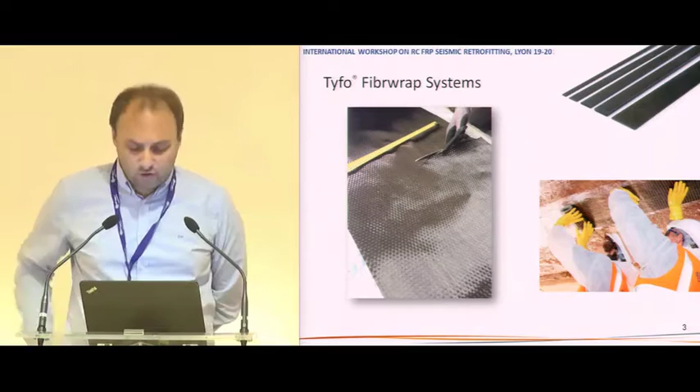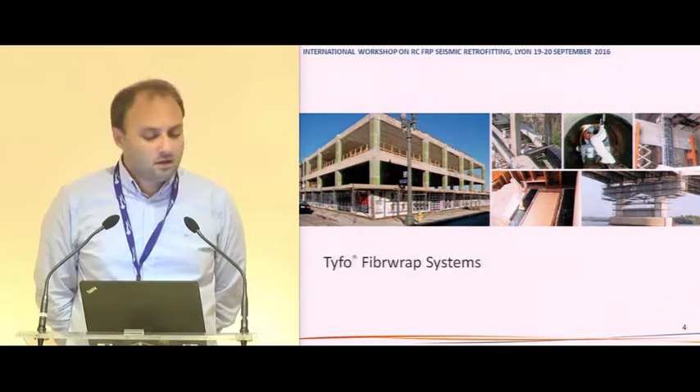After that, there were thousands of projects all around the globe, both in buildings, bridges, and other types of infrastructure projects like pipes. Blast mitigation is also a big part of our projects, and industrial structures overall.

We can easily say that it is nowadays the most approved system in the world. We have approvals in the United States, obviously, especially the ICC, the International Code Council approval. We have approvals in Germany by DIBt. We have approval here in France, Avis Technique. Obviously, our epoxies are CE certified for use in the European Union, and the same exact system with the same properties and the same epoxy is also approved in Australia, New Zealand, and all over Asia.

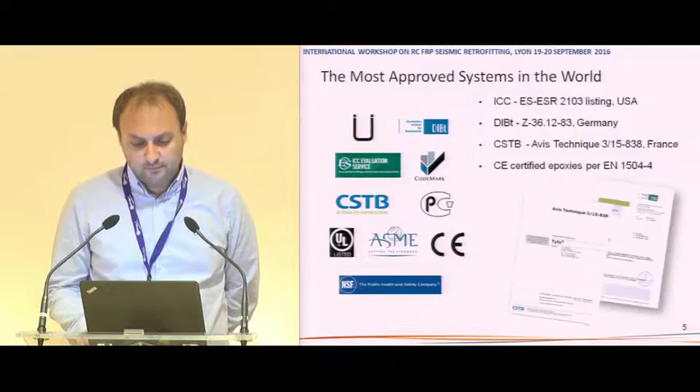As I said, we started with research, and I will show afterwards. We consider ourselves pioneers in the field of FRP strengthening, of structural strengthening by means of FRP. Afterwards, a lot of research followed. We have a really strong connection with academia. We were on the wave of FRP development, so the company was evolving in parallel with the technology. Most of the first tests in the field of FRP structural strengthening were done with our systems.

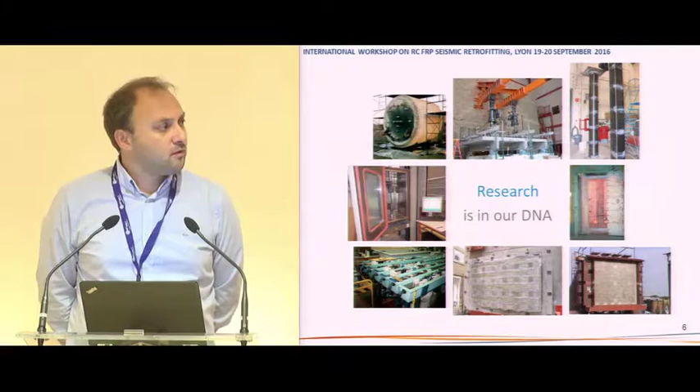We have now thousands of test reports. Some of them are obviously outdated now since there are newer and more evolved reports after them.

We also participate in committees, such as the CSTB committee and the AFGC committee, for the new guideline that you saw in the box - it was given to everybody. It's the new guideline in France for seismic strengthening with fiber reinforced polymers.

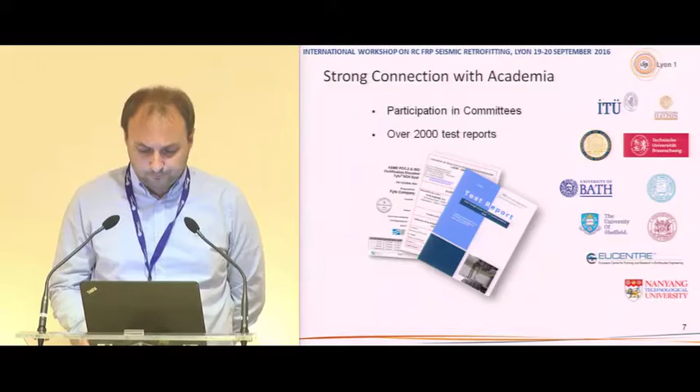This is the first test that was done for Caltrans. It was done at the University of California, San Diego back in 1988. The demand back then was to have a very rapid way to strengthen bridge piers after the event of an earthquake. I was not present at this type of test since I'm a lot younger.

But what I have heard is that Caltrans was actually investigating having prefabricated steel jackets ready for the event, to go and install them just after the earthquake so they could prevent collapse from a second earthquake. Then the idea came up to wrap these columns with materials that up to then were mainly used in the aerospace industry, and introduce them in this type of structure.

So this was the first test - a large-scale specimen of a bridge pier. It was loaded laterally until it failed. You can see here exactly the shear force versus displacement diagram.

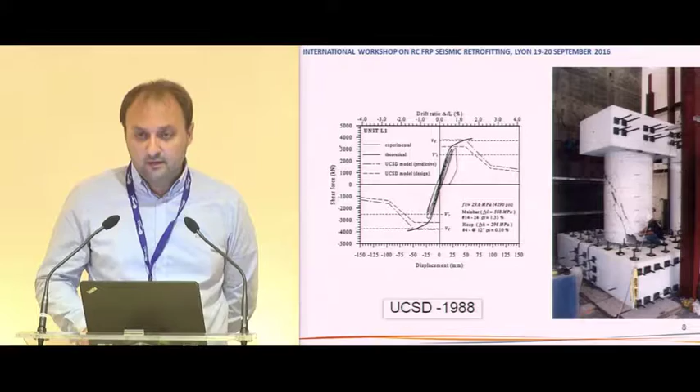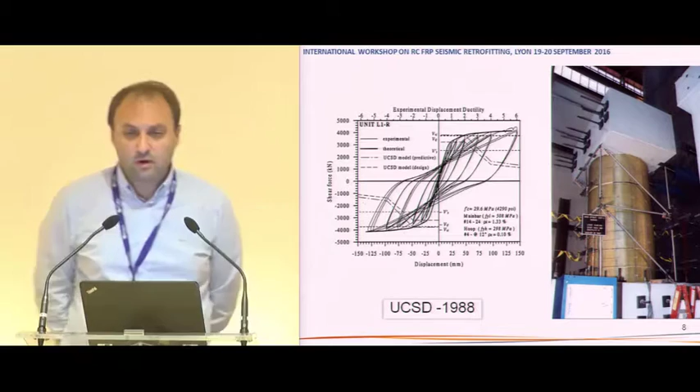Then the same column was repaired and wrapped with an aramid-glass type of fiber reinforced polymer back then. You can see the hysteresis loops and the deformability that this column had. This is one of the first tests that showed what we call the ductility enhancement - the capacity of the column to deform more without failing when it is wrapped with a fiber reinforced polymer jacket. More or less, this is how everything started.

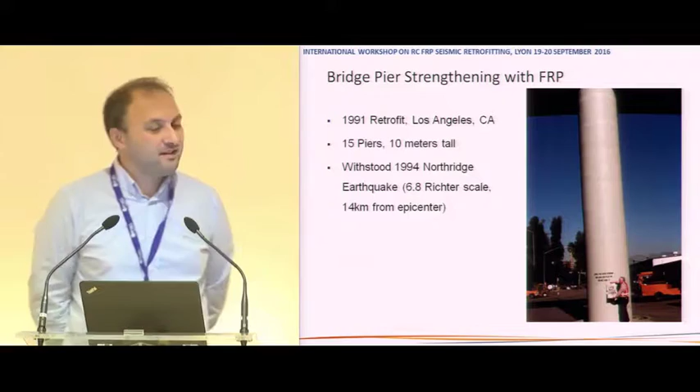The well-known Northridge earthquake followed - the epicenter was close to 14 kilometers from these piers. Here you can see the founder of the company back then, Edward Fyfe, going there with a newspaper from the earthquake, showing that the pier is standing and everything is okay.

We continued with seismic upgrade for improving the ductility of reinforced concrete columns. Thousands of columns are wrapped in this way, either with carbon fiber reinforced polymers or with glass fiber reinforced polymers. Glass fiber reinforced polymer is a good solution for seismic strengthening, since glass fibers can deform by far more than carbon fibers, though they don't have the same strength capacity.

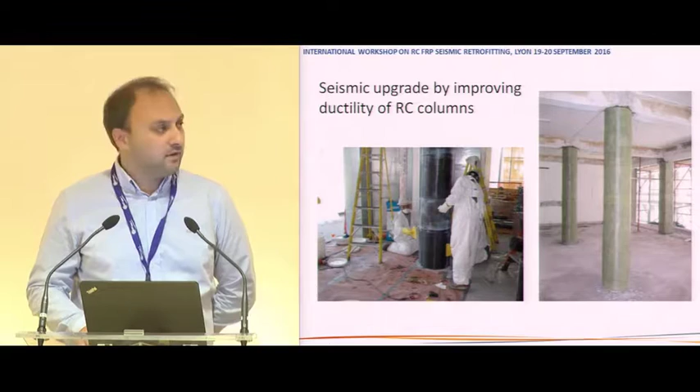But in the case that we just need to wrap for ductility, we need this elongation, and there is also the main advantage that they are by far more cost effective than carbon fiber reinforced polymers. Here you can see also some wrapping application of bridge piers.

Apart from the ductility enhancement, other types of strengthening of members were investigated, adding to the capacity. So here we see more like RC columns with high aspect ratio, or wall-like shear walls, that take a lot of shear acting on them during the event of an earthquake.

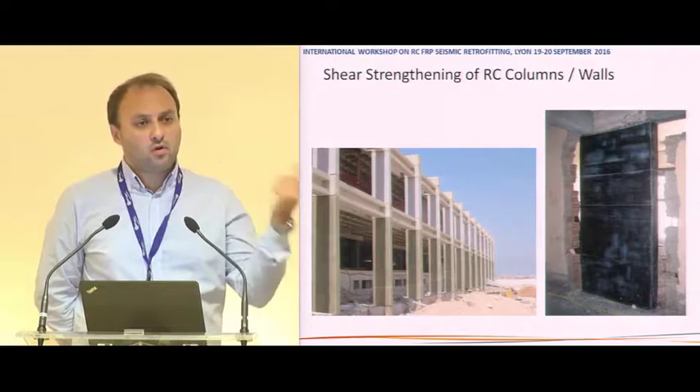So here the application is in order to increase the shear strength of the structure by adding more hoop reinforcement around the element.

This is also a type of application like that, for strengthening of a bridge pier at its base, where most of the shear action can be found during the event of an earthquake. Also, this is a bridge pier where an earthquake passed afterwards, I cannot recall which one, and still we have a satisfactory result.

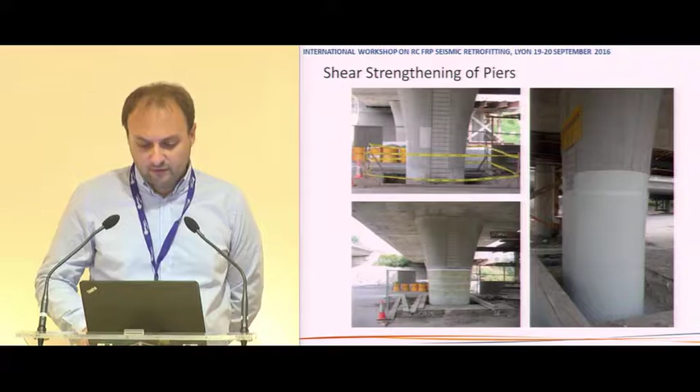Now I want to talk a bit about the Tyfo composite anchors. Fyfe is more or less the inventor of this type of system. It is an obvious way to move the stresses from the wrap inside the concrete or through obstacles. We use it to go through walls.

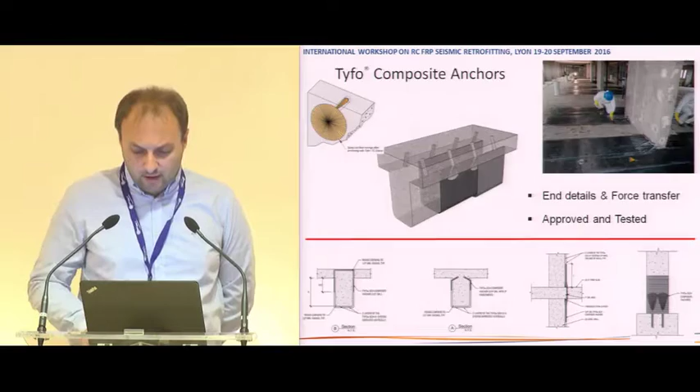We use it to strengthen a U-wrap of beams, as you can see here. We even use it for this. First of all, this is tested, tested also here in Lyon, in order to be involved in the Avis Technique approval.

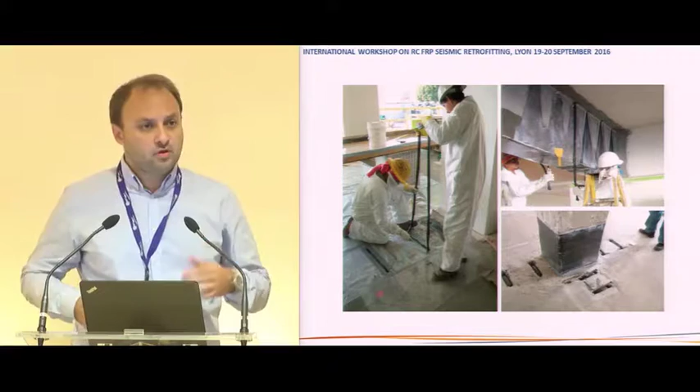We can use it even to wrap around beams. This is a case where we actually increase the ductility, the deformability of the beam, but since all the beams have the slab, we need to go through. So this is a way that with a full wrap with Tyfo anchors, you see they pass from the top, come down, open, and then also a U-wrap follows. Like that we can fully wrap the beam.

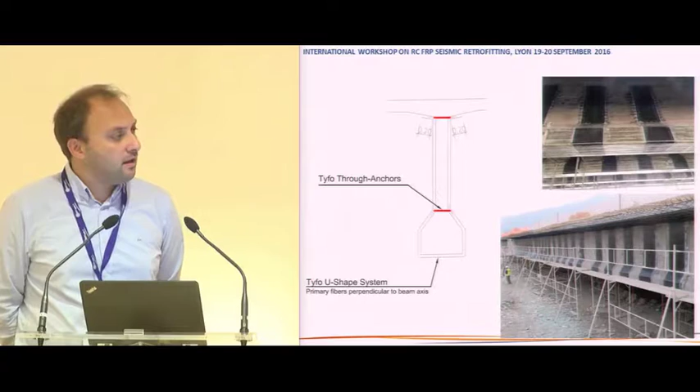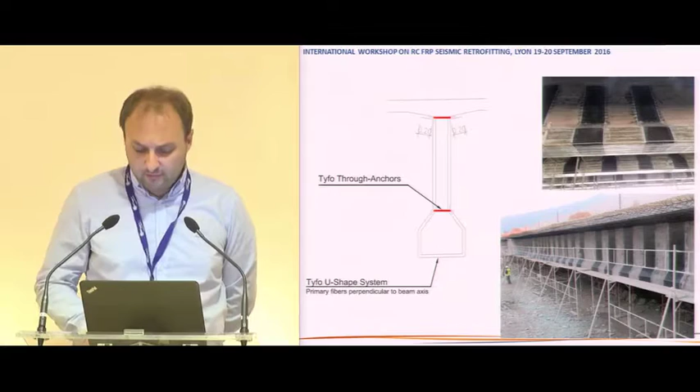Another application of anchors here is for shear strengthening of bridge piers. Bridge piers with a nice shape that includes angles may debond the system when the beam is under load and the FRP jacket is activated. So the anchors here are used in order to connect the two sides and to prevent debonding. We're talking about through anchors in this case.

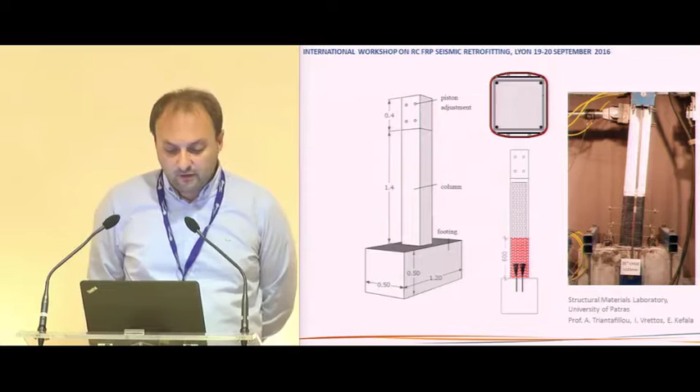Another interesting case is strengthening of columns into the foundation. This is testing completed at the University of Patras with Professor Triantafillou. It was a seismic test with lateral deformations. We investigated various types of anchors and configurations, including fiber optics to see exactly the strain deformation inside the anchor.

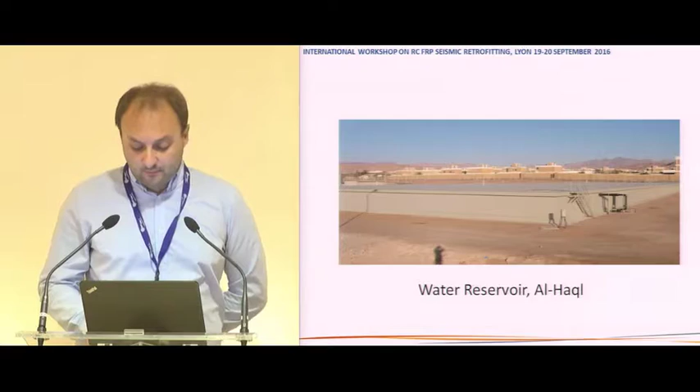A project based on that just followed. This is a water reservoir in Saudi Arabia. It had around 616 columns inside. Saudi Arabia, in the area of Jeddah, has a slight seismicity, and especially for such important structures as a water reservoir, they need to prepare for the possibility of an earthquake occurring in 1,000 years, so these important structures needed to be strengthened.

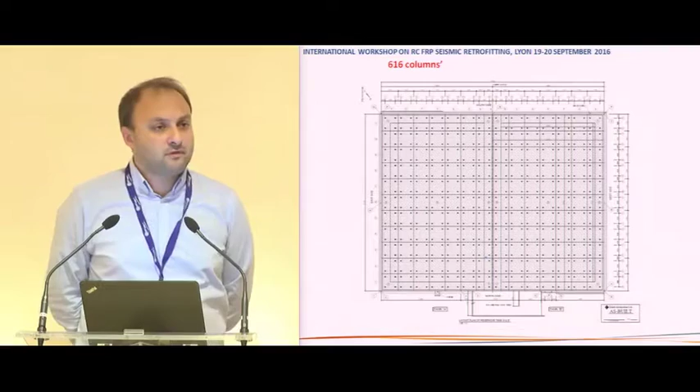So all these columns needed to be strengthened. The initial detail was actually to apply a new concrete jacket, which would significantly decrease the capacity of the reservoir.

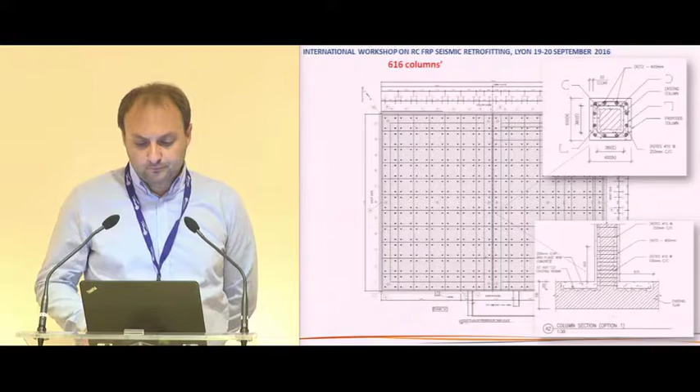We came with an alternative, and we gave the solution of wrapping the elements for having both the flexural strengthening required by using the Tyfo anchors inside the foundation, and also at the top at the slab, as well as wrapping around in order to increase shear and, in parallel, increase the ductility at these areas where the plastic hinges are about to be formed.

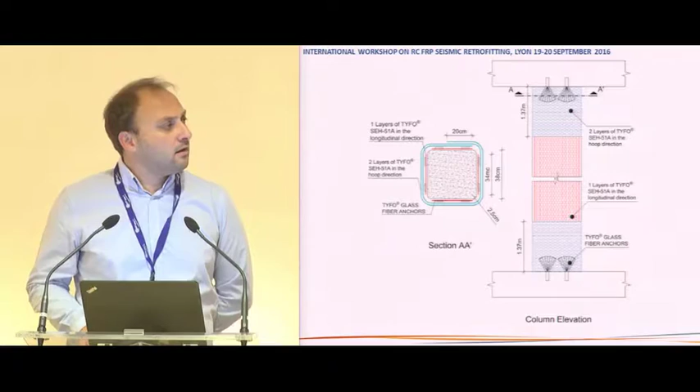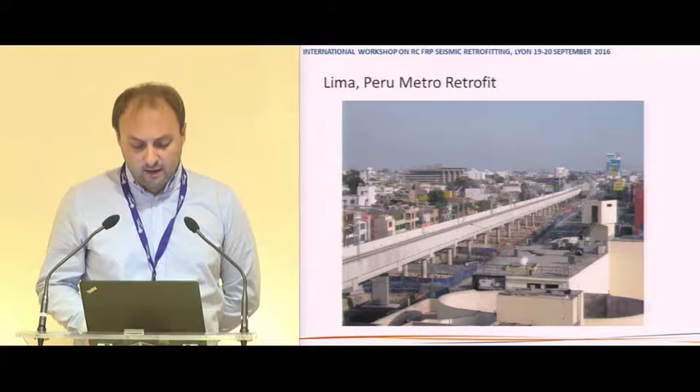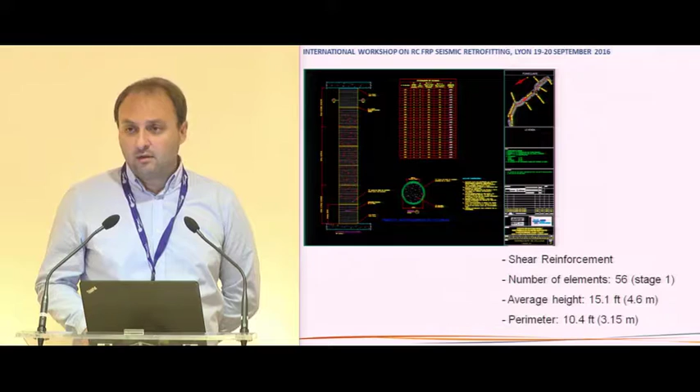Another interesting project with the use of anchors is in Lima, Peru. This is a bridge that had both circular columns and wall-like columns, as you can see in these pictures. This is the case of the circular column that was wrapped around in order to increase its ductility. This is a very straightforward application, and you can see here some pictures of it.

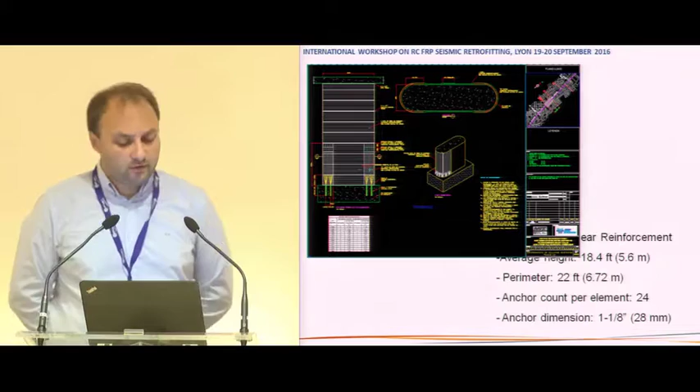More interesting is this application of the wall-like column. You can see here that due to the bending expected after the earthquake, flexural strengthening at the base was required, and Tyfo anchors were again used in order to pass all the forces into the foundation. You can see the details here, and also part of this application.

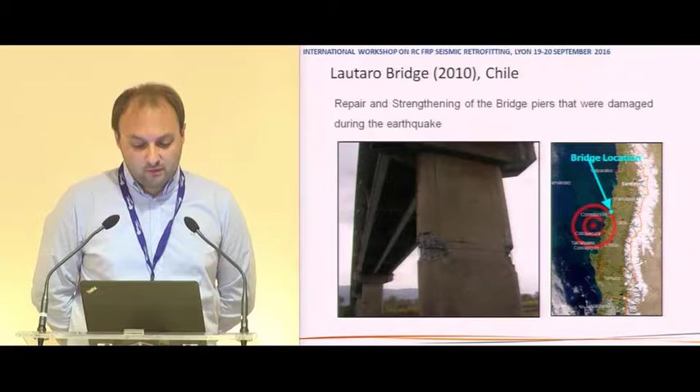Another interesting application, again in Latin America, was in Chile, at Lautaro bridge back in 2010. This is the case of a repair of a bridge after an earthquake. There was a very big earthquake, very close to the epicenter was this bridge. Unfortunately, this bridge also had a construction error from the beginning. The shear links, instead of being outside the vertical bars, the main reinforcement, were inside, so obviously there was local buckling of the reinforcement.

This is one of the main issues that we face with existing structures against earthquakes: there are a lot of construction errors and poor details, as Mauricio mentioned before, either because of old codes or construction errors that create the problem. Then there was also the failure at the base from the bending moment that resulted from the earthquake action.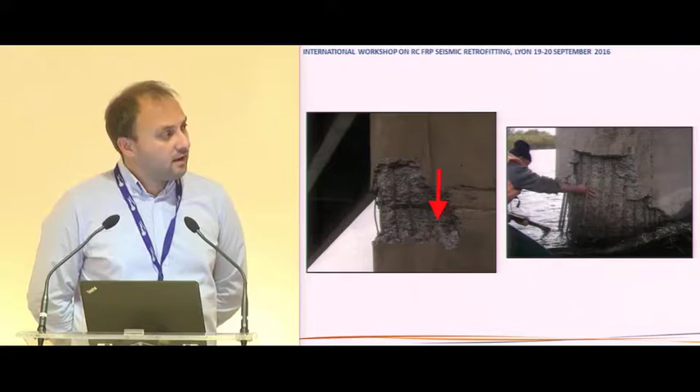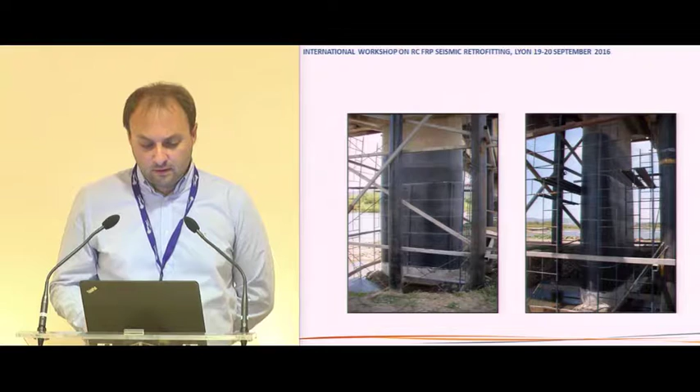So the solution was to repair all these damages, increase the bending capacity of this section, and also wrap around in order to prevent future buckling of the main reinforcement. Here are some pictures of this project and the wrap that was done around, following the repair of the spalled concrete.

Finally, I want to talk briefly about the possibility of seismic strengthening of masonry structures. In some cases masonry structures were not allowed to use epoxy-based systems, since there is no compatibility of epoxy with old masonry, especially historical structures. Moreover, there is no mechanical compatibility, since epoxy-based systems are very strong compared to the strength of masonry. Masonry works well under compression but has almost no tensile capacity, so offering some tensile capacity to the structure is in some cases more than enough to strengthen it against seismic action.

There was a big program that we carried out for the development of this type of system back in 2005, followed by a lot of research, again with Professor Triantafillou at the University of Patras, forming a guideline to design the system, and also testing its mechanical properties in the form of coupons, more or less how we do it with epoxy-based systems.

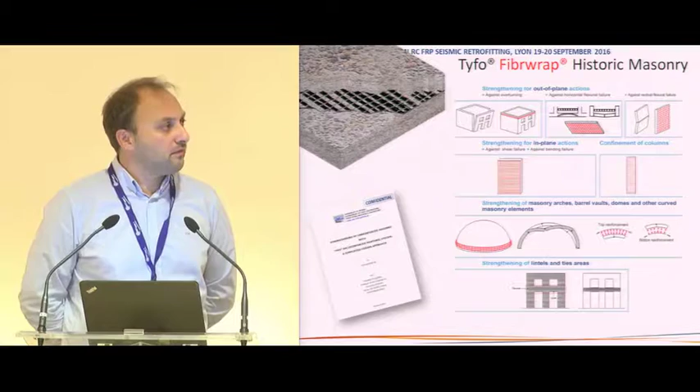With this we can strengthen masonry for in-plane actions as well as out-of-plane actions. We can wrap around, as you can see at the top corner of the structure, in order to prevent overturning of walls. This is the coupon testing that we did.

We wanted to identify exactly the mechanical properties of the combination of the fabric and the mortar. You can see here that epoxy is changed to mortar - this is the difference. Instead of using dense fabrics, we use an open weaved fabric system that interlocks with the mortar. So this is how the system works, and everything is bonded with a repair mortar onto the structure.

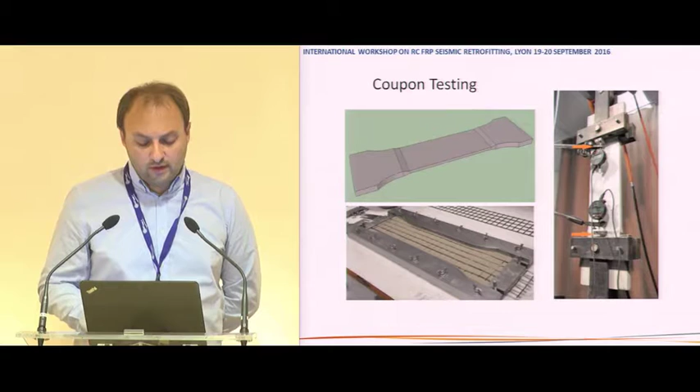Here are the coupons that we made to identify the mechanical properties of this system, and some further testing done in Turkey with Professor Ilki, for shear strengthening of masonry walls. There were old bricks from a 100-year-old typical Turkish structure used to build the walls, really simulating how old walls were.

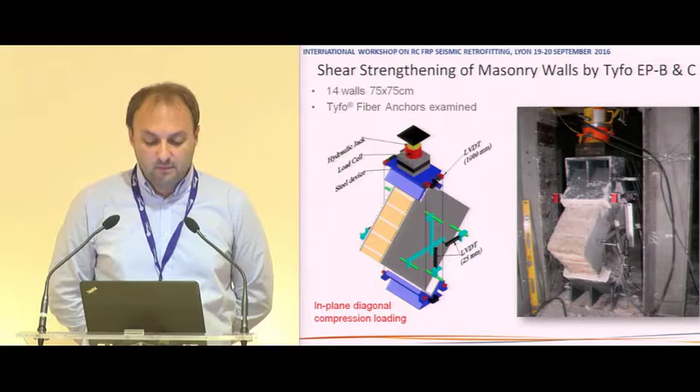The reinforced masonry system was applied on both sides of the wall. Debonding was the main failure mode, and that's why Tyfo anchors were also examined here, in order to keep the system in place, with very satisfactory results.

That's it for me - just a brief introduction to the overall technology and some projects that I showed. Thank you very much for your attention.